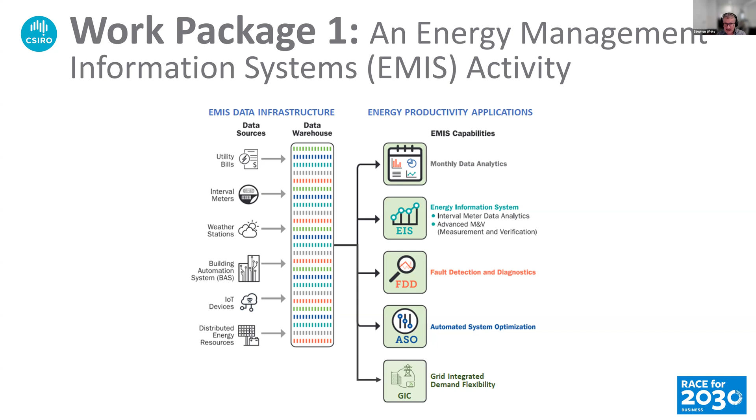Just a little bit more information on what is this thing called an energy management information system. I love this diagram, it's from Lawrence Berkeley National Labs in the United States, which describes it as a kind of two-part solution. One part is the digital infrastructure to hoover up all the required data and warehouse it and make it accessible. The second part of the EMIS is then to do something useful with the data, that is provide analytics and perhaps control solutions that actually go about saving energy. So EMIS has both a data infrastructure component and a productivity apps component.

Interestingly enough, it's perhaps a little bit different to a simple technology installation when you actually go about making this happen. I kind of see it as a bit more like a continuous improvement process, which is probably arguably not as well suited as we might like for the certificate schemes.

Starts off at the bottom left there with the EMIS infrastructure component. The consumer will need to do some research to find out what infrastructure they need. It needs to then be installed, which has both a hardware and a software component. But the hardware itself doesn't necessarily generate the savings by itself. Typically there has to be some sort of business improvement process that gets implemented as well, to take the knowledge from the hardware software solution and implement it in the site.

So once you have your EMIS infrastructure, it's giving you suggestions to rectify a bunch of problems that might be there. You need to go about bringing in contractors to do the rectification works. And once you've actually fixed up all the problems, which are typically discovered in the initial phase of implementation, then you can start to also look at using your digital infrastructure to do things that you otherwise couldn't and drive additional performance.

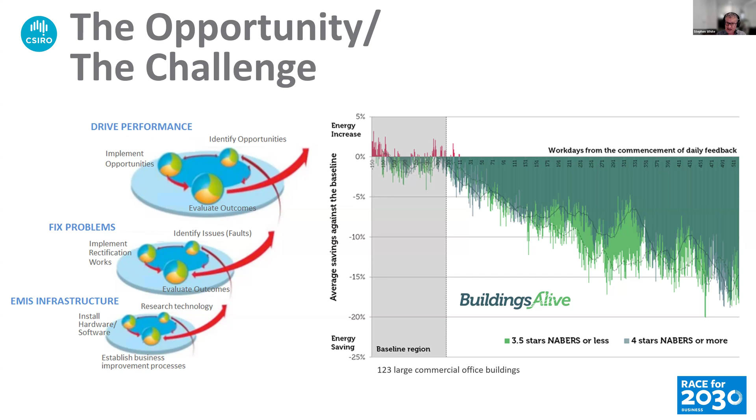And I guess as you'll see during this there's this idea of a baseline period. This is prior to anything happening, where sometimes you're consuming a little bit more, sometimes a little bit less, but things are trickling along as normal. And then you start taking action, and then you start to see the savings.

So, good piece here - large untapped energy savings potential that we're not creating certificates from at the moment, but it's pretty tricky to recognize in the scheme. At what point was the go button hit here, where the installation had happened? Is it the end of the baseline region? Or is it after one year of rectifying problems, or some other time?

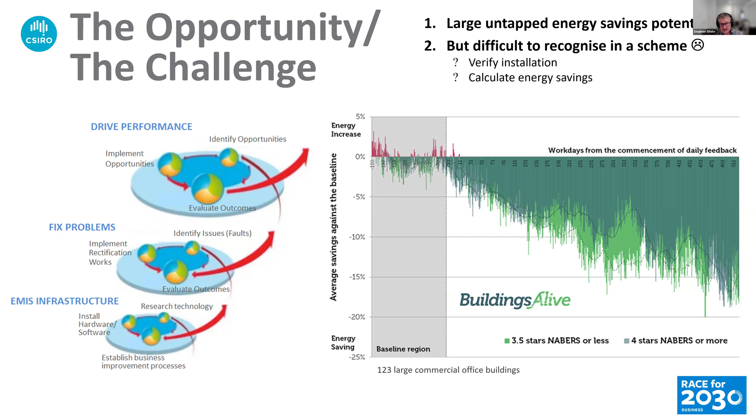Where's your kind of cut-off point for verifying that the project has now been completely implemented? And if the energy savings are bouncing around each year, how do you actually go about calculating those? It's particularly tricky to deem them up front because you typically can't tell exactly where the problems were that you were rectifying until you've actually got started on the project itself - the classic catch-22 in energy efficiency areas.

So the research questions in Work Package 1: what is or isn't an energy management information system? How would we define it in a scheme? What constraints should be placed on eligibility, and how should we calculate the savings, and hence the number of certificates that an installation should be worth? So that's Work Package 1.

Work Package 2 is about the calculation of the number of certificates. There are some existing methods. As I mentioned earlier, the stock standard or most used approach is so-called deemed savings, where it's already specified what the installation is. So if you change out to an efficient lighting system, you can look up the factor and claim it up front. But for more complicated solutions, there are more bespoke ways of doing it, typically using measurement and verification.

In the New South Wales scheme, there's project impact assessment, where you assess how many certificates you think it's going to be, then you come back after installation, having done some measurement and verification to prove your impact assessment was good, and you can claim the certificates for the 10-year period after that. So you do get some level of bringing forward of certificates, which is very attractive for consumers.

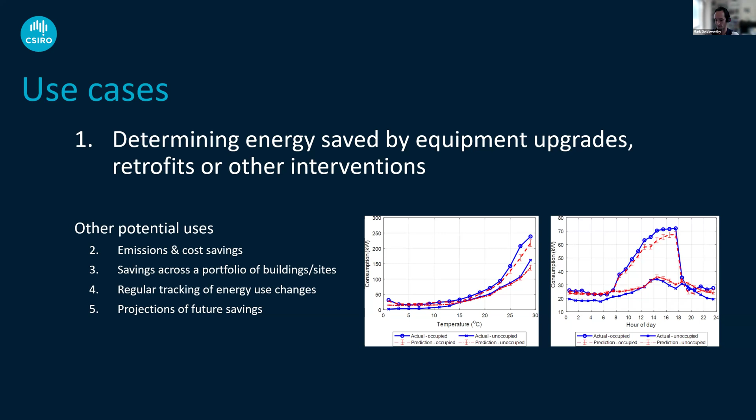So the starting assumptions for developing this tool were that not all sites would be suitable. We know the tool is not going to work for every building, and not all savings are going to be detectable—there's a threshold below which the accuracy won't be able to detect the savings.

We assume that smart meter data is largely trustable. It's used in billing, and there are standards around the equipment and so on, and that largely we don't have other data from the site—we have weather data, but not other information or other data streams.

So the method requirements: we want it to be autonomous, trustable, auditable, very low effort on the part of the user, and fast—we want it to run quickly, in real time more or less.

So we did a literature review focusing specifically on what's called M&V 2.0, using high resolution meter data to do M&V analysis. There are official guidelines and standards out there—the IPMVP is one, there's ASHRAE, and other documents as well. Most of them are written for a traditional M&V approach, and there's limited information on uncertainty calculation as well.

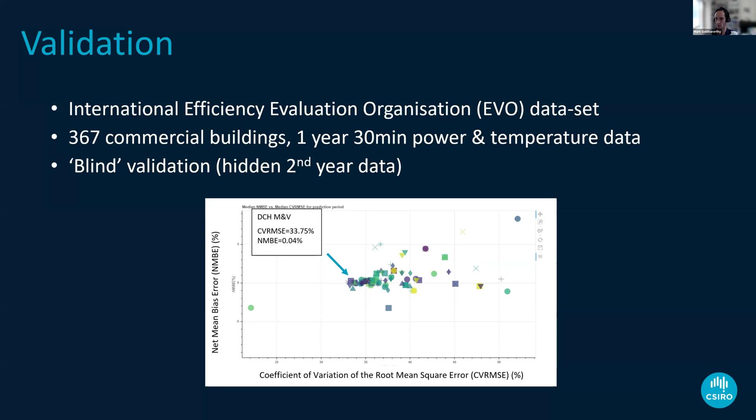So I'll run through a video demonstration now of the online portal, which will just show it working in action.

So this is where we start. At the moment, I'm already logged in, so there would normally be a login part. We hit get started, and this basically takes us straight to a dashboard where we can add our buildings. Now, here's some I've prepared earlier, which I'll show you in a moment. But assuming this is the first time I would get onto this platform, the first thing I want to do is actually add my building to my site. So we go through and add our site. In this case, let's call it building number 206.

So we give a site a name, we give a site a postcode. I'll just make this Sydney for this particular building that we're using, and that allows the app to identify the appropriate weather data, to compare how the building's energy is performing against the local weather profiles. In this case, we're looking at an all-electric building only. So we select our energy retailer, and then we put in our NMI number. So in this case, our NMI number is 31697932006.

When I hit submit for this, the app comes up with a whole stack of terms and conditions, which we haven't sorted out yet, hence the holding text you can see there. Once I accept the terms and conditions of providing my data to the system, it now goes away and sees if it can find that NMI meter and access that data. And here we go, we've got success.

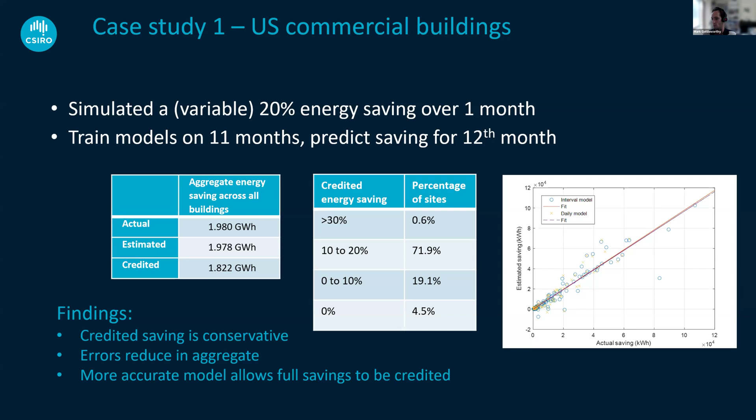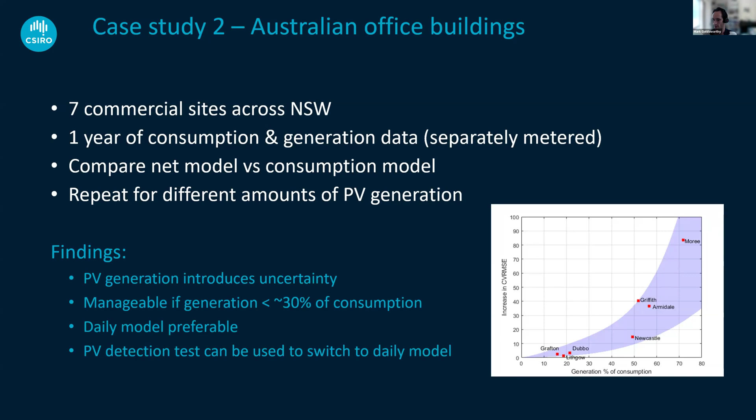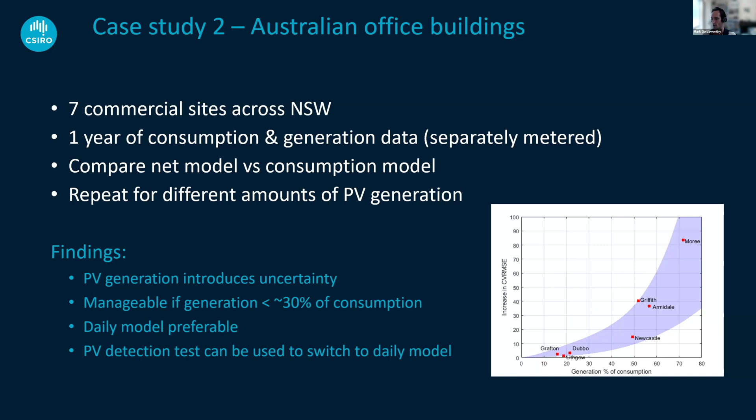We designed a test to detect the presence of PV generation in net meter data, and that worked well. We used that to switch between the hourly analysis model and the daily model, since the daily model works better when there's PV generation present.

So the third case study had 13 different Australian sites. These aren't all office buildings, but a range of different use cases. We had the NMI meter data, and several of the sites had multiple NMI meters.

So there's something going on at this site. I don't know what happened. Maybe they installed a large array, maybe they did something else. But there's a reason why the baseline model should fail for this site. There isn't a steady usage pattern, so you shouldn't be able to calculate a baseline with that data.

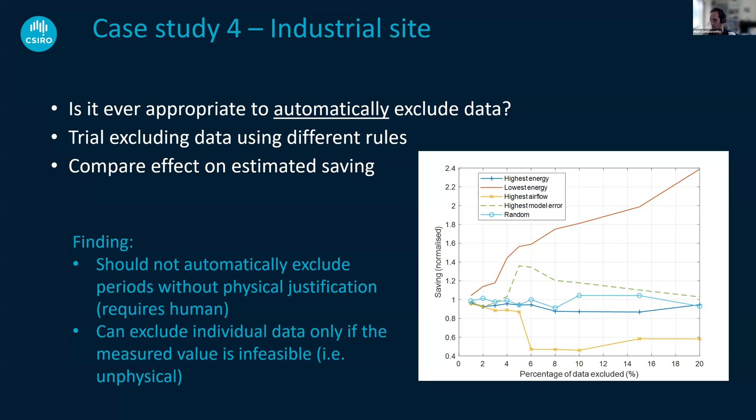So in summary, we've developed this automated M&V analysis approach. As Stephen mentioned, it provides an additional M&V pathway that might work for some sites. We expect on the order of half of sites, based on the case studies we've done.

But a key part of it is for those sites where it doesn't work, we want to fail fast. So you saw in the video, it's a quick process. There's existing meter data there to use. You can determine the model quality and eligibility in real time, and the quantification of the minimum detectable savings even before you've done any interventions or planned an M&V project.

So I've talked through the analysis process today, the scope to streamline the broader M&V process as well. I'll hand back to Stephen now.

Thanks, Mark. So just going into the last section. Sorry, we're running a little short of time, so I'll try and skip through reasonably quickly, focusing in on the EMIS activity and the research we did there.

And we did extensive consultation, so just looking at some of the things there. In terms of the research we did on the EMIS activity, we did a stakeholder mapping to work out who's who in the zoo and what products they're offering. We asked those stakeholders to give us written responses about their products and why they should or shouldn't be included, and expectations. We did a bunch of financial analysis.

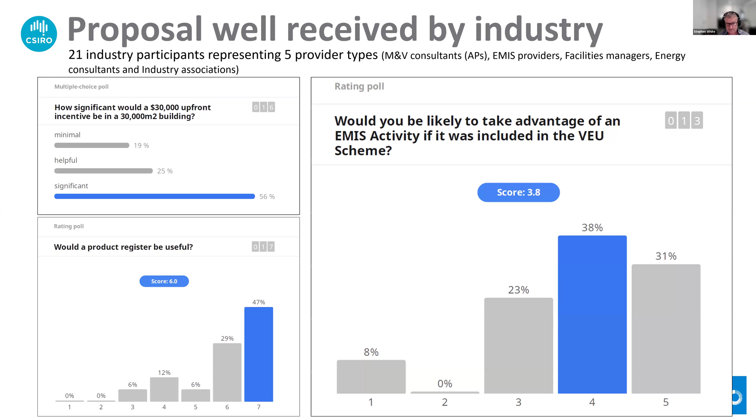We took that to industry - M&V consultants, accredited persons, EMIS providers, facilities managers, and the like. The money up front was deemed to be worth the effort, that sort of $1 per metre squared for the deemed certificates for the foundational EMIS. And you can see that strong desire for a product register to avoid the race to the bottom. That whole idea that this scheme points to quality product was certainly important for industry, scoring a 3.8 out of 5 in terms of saying this is something we would do if we had this in place.

We took it to the Sydney Better Buildings Partnership as well, and went through a ranking exercise of what are the most important things for this. Interestingly enough, it wasn't the money for the building owners or consumers of energy - it was more that streamlining of process and fit with NABERS assessors. Ease of record keeping are the things deemed most important if this methodology is going to succeed.

So if NABERS assessors are the people most likely or most desired, we thought we'd better go talk to NABERS assessors. We sent out an email to 240 names of NABERS assessors, and 40 odd people came back and said yep, they'd like to participate, which was quite a nice turnout. Again, a really positive response - yes, it's worth pursuing further, and if it was available, yes, we would use it. So strong endorsement for what we were doing.

So in conclusion, what are we saying needs to happen? What are the next steps for us? Now I go into risk of opining on how I feel the world should be, but based on what we've found...

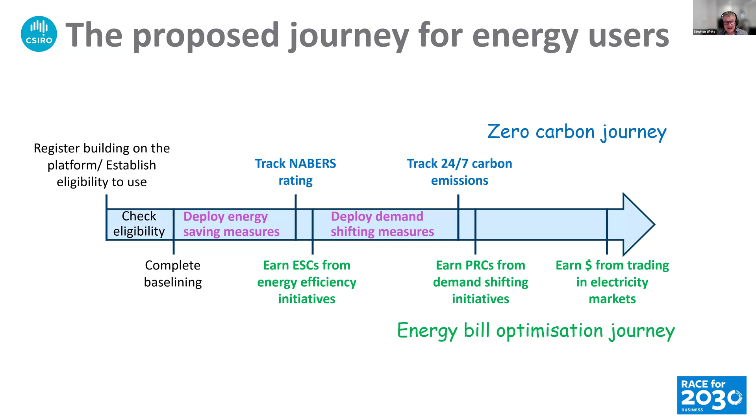What we'd love to see is a journey for energy users that starts off with getting on the platform, checking whether you're eligible and can get a statistically appropriate baseline, deploy your energy saving measures, go on your NABERS rating reduction journey towards zero carbon, start earning your ESCs and reducing your energy bills, then start deploying your demand shifting measures and tracking your 24/7 carbon emissions. Because this methodology can be done on an hour-by-hour basis, you can match it with grid carbon intensity, and start to think about earning peak reduction certificates and potentially even taking some level of trading exposure on electricity markets. It's kind of a journey that these sorts of tools can potentially allow.

But ultimately, what we're trying to do here is address a whole bunch of stuff that's not getting through the system at the moment. So how do we reach hard to reach sectors - ones with smaller sites, less skills to do this stuff, less informed about the opportunities, such as what you'd see in the low to mid-tier buildings.

Based on what we've found, we have three recommendations here. One is to make this M&V tool available to industry as a government-run or government-authorised methodology. At the end of the day, no one told us they want more innovation or a more competitive or efficient industry. They said the feeling was that this is a very competitive industry, but the issues we're facing are: we don't know who to trust, we're worried about misleading claims, and we want to reduce compliance risk. So the idea of a government run or authorized method would have strong resonance, is what we heard.

NABERS assessors are already in the buildings and already have some level of training. If they're going to use this, it would be great to help them run this tool, because they're the ones who can do the education journey required, and they also have the expertise. The last way to get over that catch-22 is to implement foundational and advanced EMIS, which would help people get started in a relatively low-risk way on their journey for energy savings.